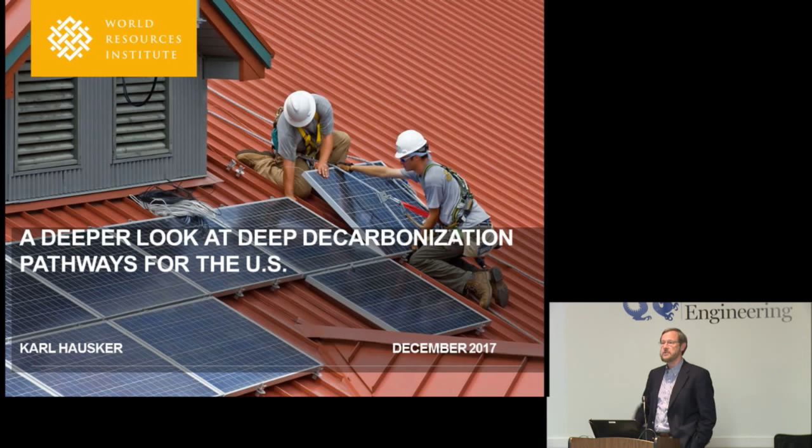Okay. Thanks very much for this opportunity to be at Drexel today, and also to talk with people online. The full title of my talk is A Deeper Look at Deep Decarbonization Pathways for the U.S. If your focus has often been very urban, we're going to kind of zoom out to the national level in my talk today. Let me give you sort of an outline of where we're going to go. We're going to do a little bit of background, talk about the 2 camps on deep decarbonization, take a look at some studies, and then talk a little bit about the policy implications.

Disclaimer, I'm speaking only for myself. World Resources Institute is 800 people, and we have, of course, diverse views across that large number of people. I'm going to be moving very fast through some material. I have lots of links in my PowerPoint, and I'm happy to email it to anyone who requests it.

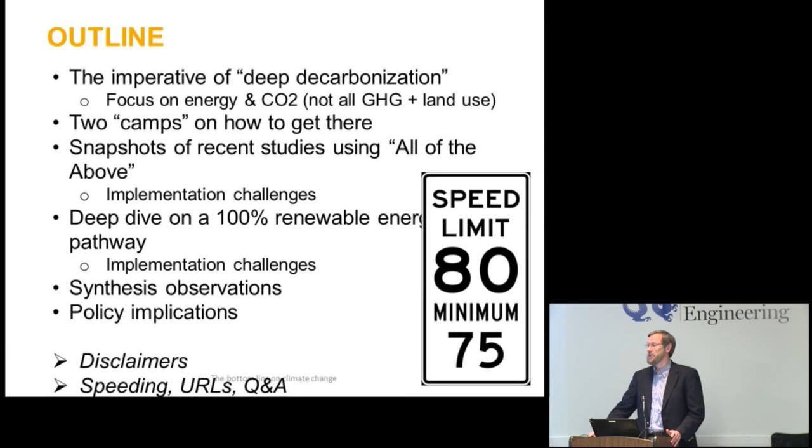But let's start with the imperative for deep decarbonization. If you don't think that climate change is an existential crisis for civilization, then you're probably in the wrong room, or you got the wrong link online, and what I'm going to say makes absolutely no sense. But if you do, then you know that we need to reduce greenhouse gas emissions by 80% or more by mid-century, and that's a big challenge, a doable challenge.

But it is a steep path. Today I'm just going to focus on energy and CO2 emissions from energy. As I'm sure everyone knows, we actually have 6 greenhouse gases to tackle, as well as land use changes that affect the amount of CO2 sequestered in soil and forests.

What I'm going to describe to you, and as many of you probably already know through your work, I'm going to describe 2 camps in how we reduce carbon from the energy sector by 80% or more. There is a camp that says we need to sort of use all the above. We need renewables. We're going to have to use some nuclear power. We're going to have to commercialize carbon capture technologies and apply them either to fossil fuel plants and or bioenergy plants and or industrial sources for which we don't have alternatives. That's one camp that I call all of the above.

There is another camp that says we can do this all with 100% renewables and with various ways to integrate those together to fuel an industrial economy. There are very smart and impassioned people in both of those camps. I'll make it plain, I am in the camp of all of the above. We're going to look at 2 studies that represent that body of literature and studies, and then we're going to take a deep dive at a prominent study that says we can do this all with renewables.

This is particularly for students. You're going to be wrestling with this for several decades. For people like me a little older, we may not see the end of this debate, but it's very important to look under the hood of these modeling studies and understand really what's going on. Why does one camp say we need a portfolio of zero carbon technologies to lick this problem, while another camp says we can do it all with renewables?

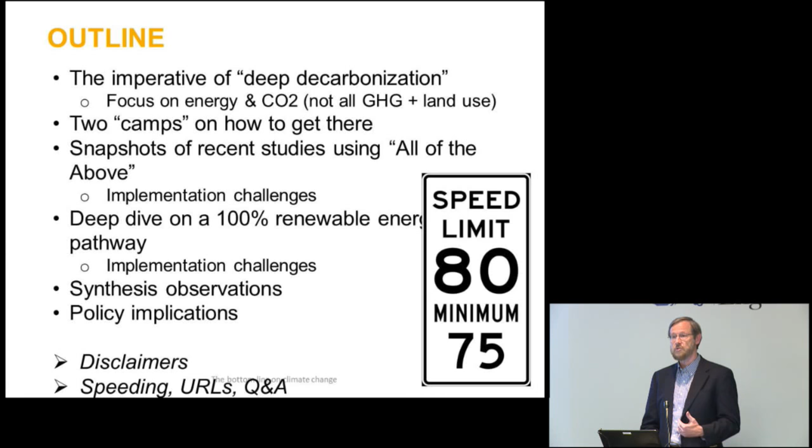So we're going to take a look at snapshots of 2 studies and look at the implementation problems there. We're going to do a deep dive on the work of Mark Jacobson out at Stanford, who has been a prominent advocate of 100% renewables, and then move to some policy implications. I'm going to stop halfway through and take some questions before turning to Jacobson's work, just because we have a setting that I think allows that.

So I'm going to talk about 2 studies that I say have a long shelf life. One I led at World Resources Institute. It's called From Risk to Return, Investing in a Clean Energy Economy. That came out in December 2016. The other, taking a similar approach in many ways, is the Obama administration's mid-century strategy report for deep decarbonization. This came out in November 2016, just after the election. Strangely, it's not on the White House website anymore, but fortunately archived at the UNFCCC. And both of these studies, I think, are important. They have a long shelf life, frankly, because the federal government isn't going to do anything like the MCS study for quite a while, unfortunately.

Both of these studies looked out to 2050. They looked at an 80% reduction in greenhouse gases, 80% across all 6 gases for the MCS report, Mid-Century Strategy Report. The Risky Business Report just looked at the energy sector. So if we look at the energy sector, across these 2 studies and the whole body of modeling and deep decarbonization, there are really 3 things we need to do.

The first pillar is that we need to switch as many end uses from the direct combustion of fossil fuels to the direct use of electricity, or to a clean fuel derived from electricity, like hydrogen or synthetic gas. So you really have to electrify the economy to the greatest extent possible. What does that mean? Transportation, obviously, electric vehicles. In buildings, it's stop burning gas and fuel oil and using electricity for all your space conditioning, of course, air conditioning, and hot water heating. In industry, it's trying to switch as many industrial applications from the combustion of fossil fuels and heat generated to, again, direct use of electricity, or perhaps burning hydrogen for various industrial uses.

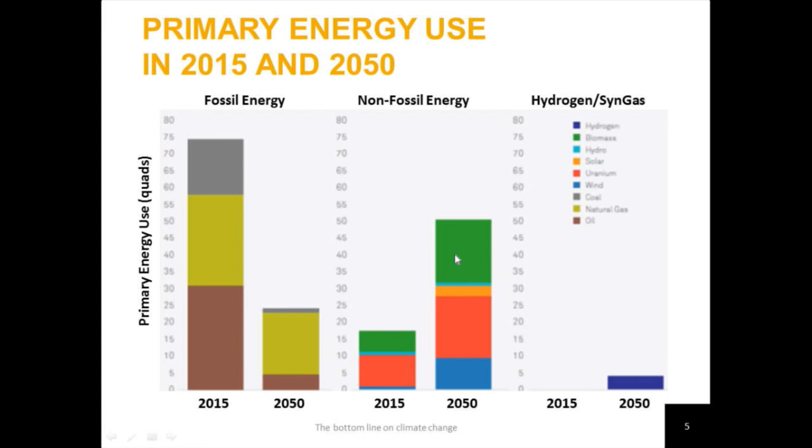You have biofuels largely right now in the form of ethanol, which is not a particularly environmentally friendly fuel in many ways. But if you are optimistic about the total biomass potential in the U.S., you can switch over to cellulosic ethanol and biodiesel and biogas, and that can play a significant role in the years ahead. And you can also, of course, grow your solar and your wind, your blue and orange bars, which look small in this primary energy measure, but you'll see they play a huge role in the power sector, as we'll see in a moment.

So in this projection, we used a model called Pathways. The MCS study used the GCAM model. Both of these may be familiar to you. Both of them have a population that grows, an economy that grows. So in the baseline projections, you have, of course, total energy and CO2 growing. But if we do the things we know how to do with commercial technologies, near commercial technologies, and apply those three pillars, we can actually have less primary energy consumption in 2050, but still supply the end-use services that we need.

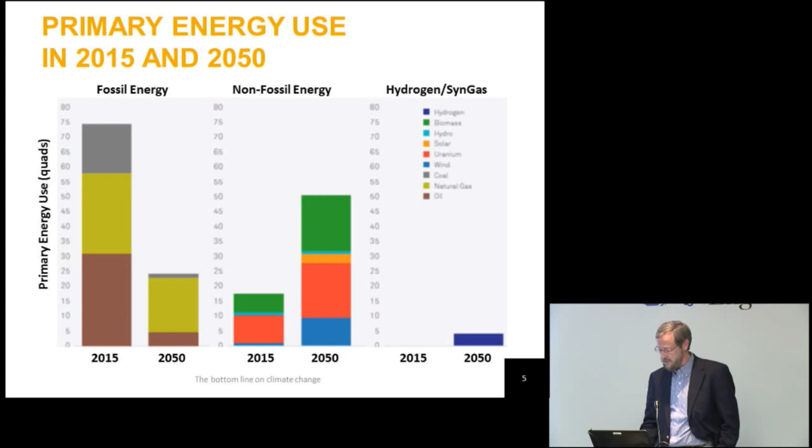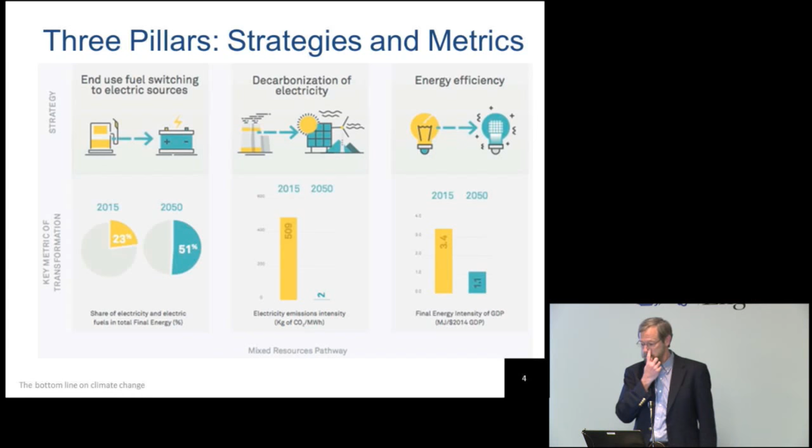Let me give you a flavor. Yes? Just on that chart where you were showing the electricity generation, you mentioned early on you were assuming that there would be a transition from fossil fuel powered vehicles to electric vehicles. So is this electricity associated with, in other words, those increases, are they largely associated with a transition from gasoline and diesel to electric vehicles? Or is there a piece of the pie not shown, which are the vehicles that continue to be powered by fossil fuels?

Yeah, this is power generation only, and the increase, I don't have the breakdown at the tip of my tongue, but I think the electrification of the vehicle fleet is probably the single biggest driver of the increased electricity generation over baseline. But there is also in these numbers the electrification of buildings and electrification of some industry sources. So I don't have that breakdown at the tip of my tongue, but I think the vehicles are a key driver of that.

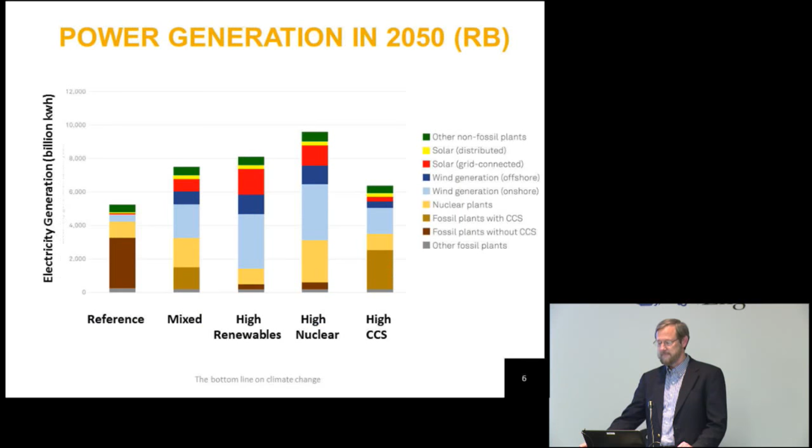Yes? In those bar graphs there, each one of these represents a scenario where we've achieved significant carbon reduction overall. So what kind of numbers are we talking about in terms of reduction in greenhouse gas emissions? Yeah, each of our pathways meets an 80% goal, 80% reduction from 2005 levels. By 2050? By 2050. But I also want to put a footnote on that, which is, for those of you who follow the science, 80% is probably the minimum we should achieve by 2050. We may need to go deeper.

So at one level, this is the least we have to do, but I also want to be optimistic in the sense that this only assumes technologies currently commercial or near commercial. Technology is going to bring us pleasant surprises over the next 30 years, mostly pleasant surprises on this front. So you can look at the glass half empty or half full on that front.

Let me describe a little bit the mid-century strategy report that the Obama administration filed, and this was done, interestingly, collectively with Mexico and Canada in late November of 2016. As some of you may know, under the Paris Agreement, nations not only set near-term reduction targets in the 2025-2030 range, but nations were encouraged to also do studies of how they can get to much deeper reductions. And this is what the Obama administration put out.

I'm sorry, this is their graphic with tiny font, but on the left we have gigatons of emissions, CO2 equivalent. We have 2005, some base case growth without mitigation, and now we see what can we do in the energy sector, CO2 sequestration, and reduction of the non-CO2 gases. And what you find here in this study is the same three pillars in the energy sector. First, an electrification of the economy and production of low-carbon fuels.

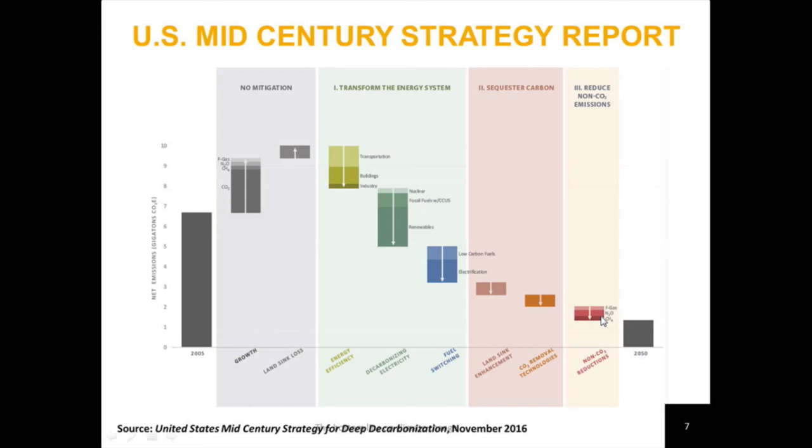That's pillar number one. Pillar number two is the decarbonization of the power supply through expansion of renewables, expansion of fossil fuel with CCS, and some expansion of nuclear power. And then finally, the third pillar, gains in efficiency across transportation, buildings, and industry. So again, similar magnitudes, all those strategies have to play a role, and the Obama administration GCAM modeling also had a role for renewables, carbon capture, and nuclear. Then they have some additional reductions on a net basis, enhanced carbon sequestration, and then some additional strategies for the non-CO2 gases. So that's what that looked like.

And just to touch base on others, what I'll call all of the above type modeling, even the Natural Resources Defense Council did modeling that was released just about 2 months ago. It's called America's Clean Energy Frontier. And again, this looks out to 2050. It also used the Pathways model as the Risky Business Report did.

But as we go from current electricity consumption out to where we could be in 2050, yes, it has a huge expansion of renewables. The color isn't quite right, but that's wind, actually. That big bar, a big expansion of solar. They maintain hydro generation, but they still have some nuclear plants operating. In 2050, they have some fossil with CCS, and they have some uncontrolled natural gas. Again, trying to make sure that the lights stay on and load is balanced.

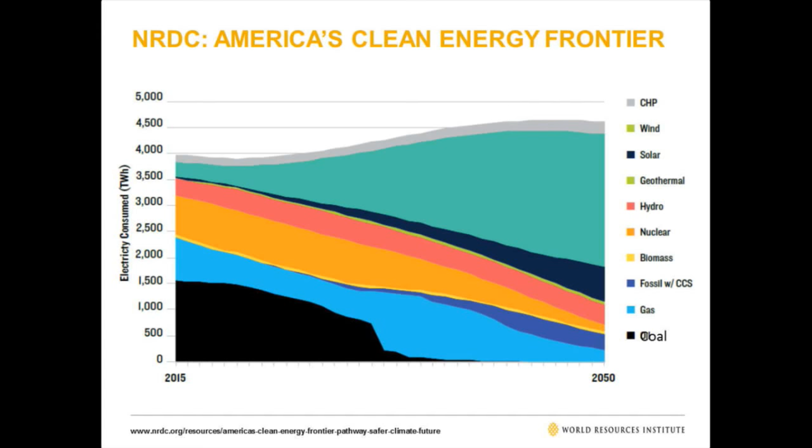If we just jump to the global level for a moment, and again, I know I'm going fast. The links are here if you want to do a deep dive at any of these studies. The International Energy Agency has over the years modeled what's possible at the global level. And last year they put out their Energy Technology Perspectives that showed where the gigatons globally would be under a 4-degree scenario if we sort of do what we've promised we're going to do so far.

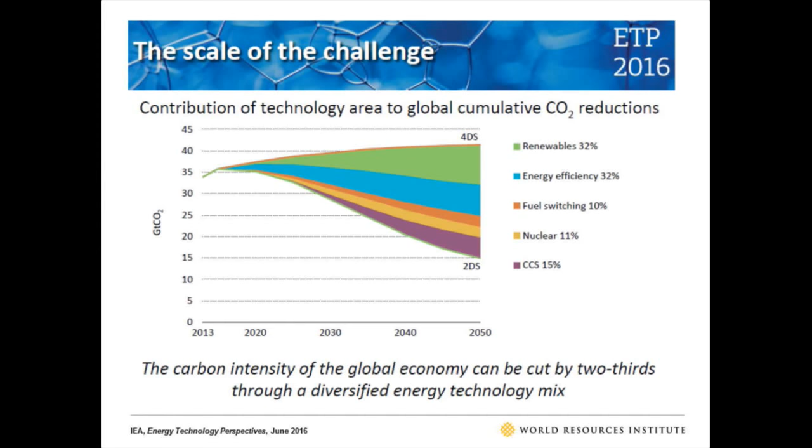But how do we need to go further to take that down to gigatons globally that are consistent with a 2-degree warming scenario? And again, they sort of say all of the above. Expand renewables like crazy, become much more energy efficient, but switch out of fossil fuels into biofuels, expand nuclear, and develop carbon capture technologies for some of the fossil. So this is what I call the larger body of mainstream modeling that says we need all the tools.

This pathway has its implementation challenges. First of all, of course, there's a lot of opposition to the expansion of nuclear power in various countries today. It also tends to be very expensive, especially in the U.S. and Europe, trying to build a plant. Other places, they seem to be able to bring plants online at a more reasonable cost. Carbon capture is still not fully commercialized. We've done some promising pilots. It's still pretty expensive. And there may be public opposition the first time we try to really build plants on a larger scale.

Renewables, of course, face their own siting problems. If you like hawks, you don't like what windmills do to hawks. If you like tortoises, you don't like vast solar arrays in the desert sometimes. So each of these has political opposition. But turning to more technical implementation challenges, just the pure rate of power plant construction over the next 30 years is kind of daunting. 2 to 4 times historical rates of construction if we're going to electrify the economy.

That expansion also has to be accompanied by an expansion of the transmission and distribution systems. And as many of you probably know, just building any transmission line in the U.S. right now faces very stark NIMBY problems. The electric vehicle infrastructure that it would take to electrify the fleet faces some interesting challenges. Are we charging vehicles at the workplace, at home, both places? Do we have fast charging technology, slow charging? Do we do battery swapping? We're not sure yet, and we're not sure how to integrate the transport sector and the power sector in a way they've never had to work together before.

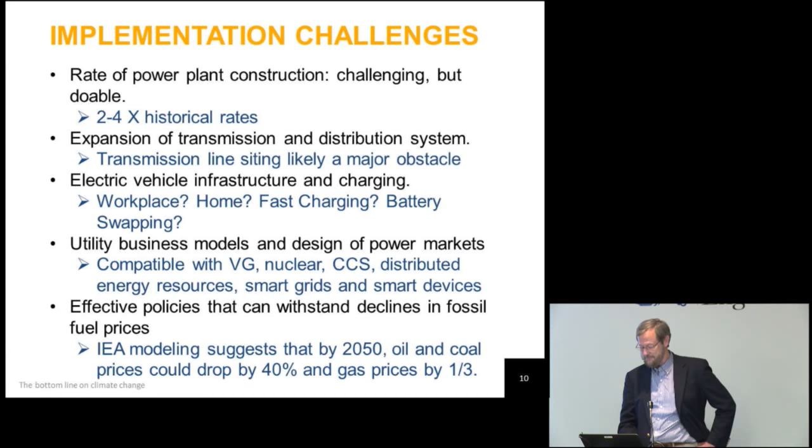But that's also an interesting implementation challenge, along with the kind of discussions that are already underway about changing utility business models, changing power market design in the wholesale markets in a way that will enable this rapid expansion of the power sector. There's also something about what's going to happen to fossil fuel prices, which I won't go into, which is kind of an interesting challenge as well.

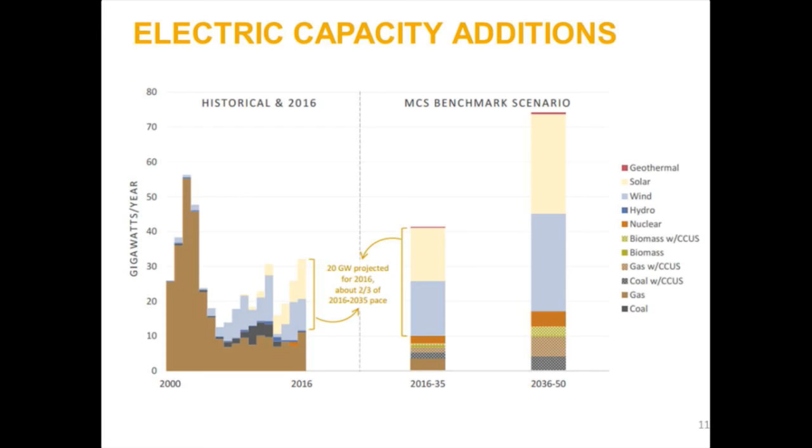Well, that needs to increase over the next 20 years under the Mid-Century Strategy Report scenario to over 40 gigawatts per year. And then in the remainder of this first half century, we need to go over 70 gigawatts a year as you really accelerate the electrification of the economy. Is this impossible? No. But you have to line up the policy, you have to line up the financial sector, you have to line up a lot of things to enable that rapid expansion.

So let me stop there. I'm going to switch to the 100% renewables, but again, I invite any other questions and any online questions on the first part of this presentation.

Yes? Do you have any thoughts on what can be done to further this sort of decision-making? I'm sort of assuming that if we had a carbon tax or a cap-and-trade system, that would incentivize all of this. And there's a lot of talk now about what localities and subnational actors can do. Do you see a role for subnational actors in the absence of a carbon tax, in the absence of a national policy that could possibly affect this? Mm-hmm. Yeah.

I'm a little depressed about the role of federal policy over the next couple of years, and my talk so far has been kind of policy free. As with the discussion on the 100% renewables, we're looking more at kind of the technical feasibility. We can also talk about cost a little bit, but of course none of this is going to happen without policy. And so the bad news is, looks like we are totally going the wrong direction at the federal level.

But the good news is that there's been an incredible surge of support at the state level, local level, business level, and I think the U.S. can keep some momentum going over the next couple of years. Not the full momentum that we need, but hopefully wiser heads will recognize that we need strong federal policy. A foundational driver is a carbon tax. I don't think it's sufficient.

Some economists may differ, but in my view, a combination of a carbon tax as kind of a foundational signal, along with a series of well-designed incentives and regulations, some at the federal level, some at the state level, some at the local level, need to combine to create the scale of change and the direction that we need.

For instance, smart growth and transit-oriented development are an important part of becoming a more energy-efficient society. There are not many federal or state levers that can affect that very well. They can create a supportive environment, but a lot of those decisions are at the MPO level, city level, county level. But we can come back to a policy discussion at the end. I don't want to go down that road too far right now.

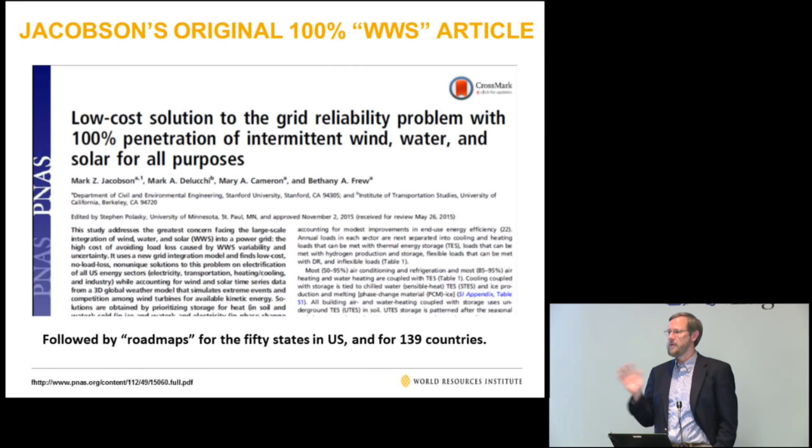In the interest of time, I should move on to 100% renewables. And again, I want to caution that there are very smart and impassioned people in both camps. I happen to personally believe I'm in the all-of-the-above camp, and I'm going to talk about the 100% renewable camp and some of the criticisms that have been leveled at this work.

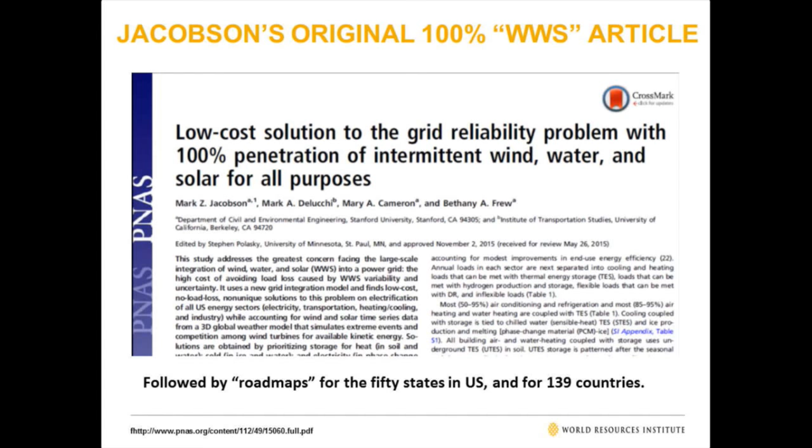Mark Jacobson and some co-authors first put out a scenario for the U.S. of 100% wind, water, solar, all renewables in 2015. They have followed that with publications that have provided sort of similar roadmaps or pathways for each of the 50 states and also for 139 countries. So they have a model, they have an approach that they feel works sort of across the board.

There have been a number of people who care about climate who have really embraced this idea of 100% renewables. You have Hawaii setting a law that says 100% renewable by 2045, legislation in California, Oregon, Washington, other states. Four senators introduced a 100% renewable by 2050 Act. You have cities, over 100 cities, I think, that have said we're going to go 100% clean energy, and I think they mean, you know, renewables. Over 100 companies embracing this.

And Jacobson's work has put him on the cover of Scientific American and TED Talks, and it's really become kind of a base for saying this is how we should go. And it's also reinforced by the fact, as I mentioned earlier, that the cost of solar and wind has dropped dramatically over the last 10 years, and also we're developing batteries, prices have come down.

So what's not to like about this? It's very significant for those of you who want to stay close in this field. There was a very significant event in June of 2017. Just as Jacobson published in the Proceedings of the National Academy of Sciences, 20 leading climate and energy modelers published a quite withering critique of Jacobson's work in June.

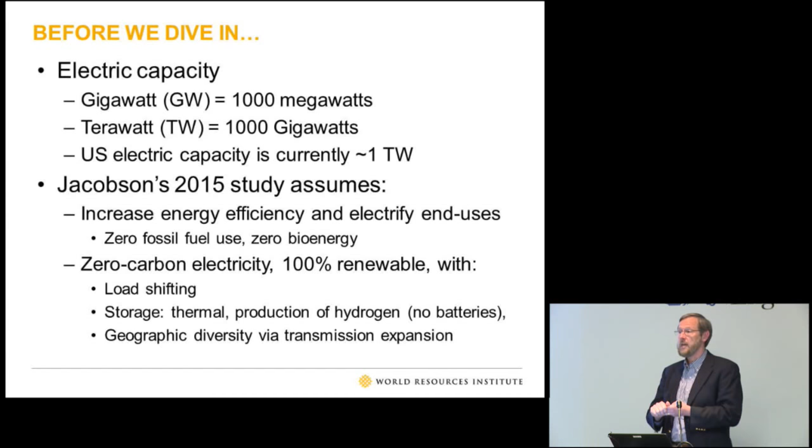And finally, he takes advantage, as all modelers do, of aggregating across geographies the production of wind and solar, which the more you can aggregate with transmission lines, the less variable it becomes. As the sun may be shining here but not there, wind is blowing here, not there. This is all pretty straightforward. Qualitatively, how do you integrate variable renewables? You shift load, you store power, and you broaden geographically the area which you're producing.

So let's take a closer look at his numbers. And I'm sorry for the quality of these charts. This is only the second time I'm doing this talk, and I've basically pulled in Jacobson's tables and some figures, and I've tried to annotate them to try to get you to some of the key features.

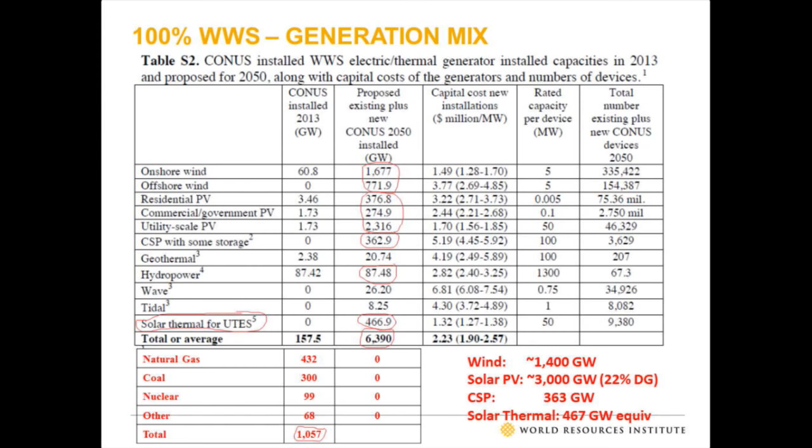You add all those up, and you get to a 6.3 terawatt capacity power system. That is huge. Or just to be sure, if we take out the pure solar thermal to store heat, we're a little under 6 terawatts. So multiplying the system almost by a factor of 6, that's a lot more than all of the above scenarios. But that's what our generation mix looks like.

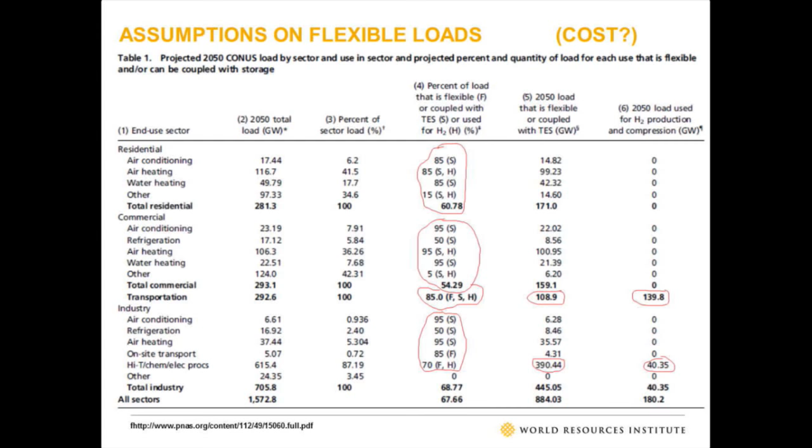That's a very important strategy, but things like this are unprecedented in terms of the small experience we have with demand response and load shifting currently. So that's something to keep in mind. And by the way, he has no cost numbers for what it does to do this. It's implicitly assumed to be done free, and that's also a pretty heroic assumption in my view.

Second big integration strategy is storage. This is his chart on how he does storage. Most of the items are pretty small across phase change materials. He's producing some ice, phase change materials that go into concentrated solar power. But the big heavy hitter here is underground thermal energy storage, or UTES, where he has, again, 500, 700, over 1,000 gigawatt equivalent of underground thermal storage.

This would require retrofitting underground thermal storage across all sorts of buildings across the U.S., again, at a scale we've never seen before. And he also has some thermal storage that keeps the power towers running in the desert. These are very big numbers, and you can see in one of his footnotes, he's storing 30 days of heating load at the peak winter in some kind of materials, solids, liquids, phase change materials, to get us through winter times when renewable production is way down.

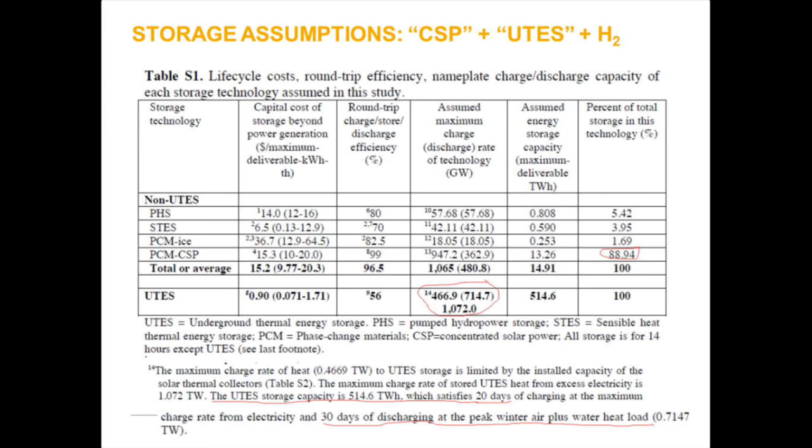Finally, that third integration strategy is transmission, making sure that we can wheel power. I have a graphic here that shows how this is done by very detailed granular modelers who physically model the system, transmission flows, transmission lines that need to be built, etc. In Jacobson, he kind of has a geography-free model. There is no spatial modeling of where plants are built or where transmission lines.

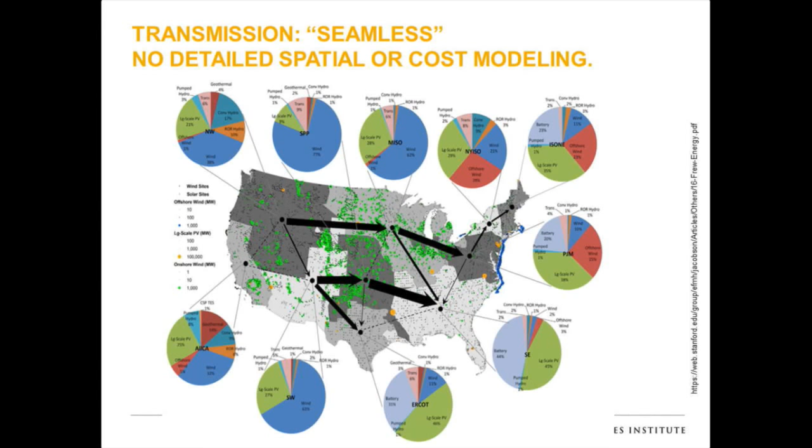He sort of just aggregates the country and assumes that a transmission system will be built that can wheel power very freely around. He has a cost number in there, but it's not driven by careful spatial modeling, which again I think is something that we need to take a deeper look at. Let me just stop there for a second on questions before we go to do an even deeper dive on how this might play out in balancing load. Storage, flexible load, transmission, sources, yeah.

The load shifting, can you explain in detail sort of what that means? Yeah. For industry, it means running plants. Part of the strategy is running plants in the middle of the day when there's solar electricity available. You might not be able to have 3-shift factory plants anymore. You might be able to operate your factories only when we have power available. It means producing hydrogen when the renewables are available and storing it and not producing hydrogen the rest of the time.

It means charging electric vehicles only when we have wind and solar available, but running them down when it's not available. We're taking baby steps in some of these directions, just cycling an air conditioner. You can't run it all the time, run it when the utility lets you run it at a relatively low production cost. But it would be a massive transformation of the power system to have the degree of load shifting as illustrated in some of these figures. I kind of described it, and then his load shifting is shown in some of these graphs. Yeah. Well, just to build on that for a second, so some part of that equation is possible if there's a will.

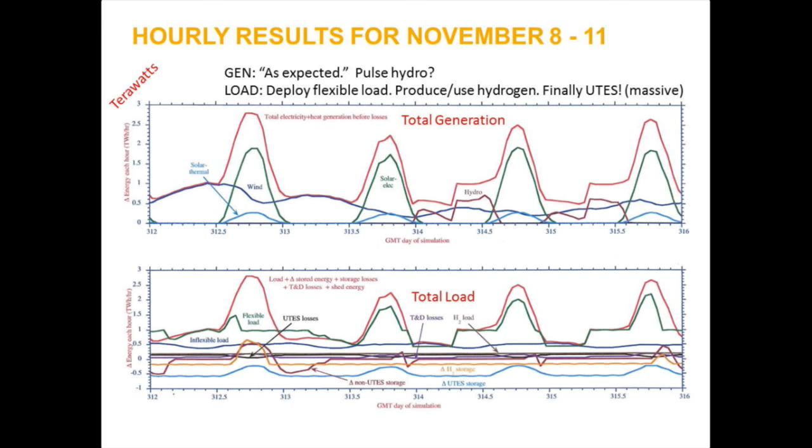It's not like this every day, but he runs his model like anyone would, and each day is going to be a little different, but there are patterns, of course. And then on the bottom, we have how he uses flexible load and storage, and I'm going to zoom in because this is so hard to read, but he offers up these sort of 4-day depictions from his stochastic modeling. Now let's see if we can really figure out what's going on.

So here's the same graph zooming in on 2 days. And again, typical day, you have a nice hump of solar production, maybe about 10 hours or so. These are half days, so maybe that's almost 12 hours. And then the wind, the blue line goes up and down. You add it all together, and here's your total generation. And now we have to figure out what's going on in the rest of the system that somehow matches the

generation we're doing. So on the bottom, in those same hours, first of all, we just have some inflexible load going on here. But Jacobson is saying, I have a bunch of flexible load that can be shifted on the order of 1.5 terawatts. Again, remember, our whole system now is 1 terawatt power. Over here, he's shifting almost 2 terawatts of power to the peak of generation of renewables there.

In this down here, he's taking, let's see, I think this is hydrogen production. In those couple of hours, he's running those hydrogen plants, producing hydrogen, but when the sun goes down, now he's below the zero line. He's using hydrogen across these hours. This is November, it's kind of cold. He's discharging thermal storage to warm buildings, I believe, with this light blue line.

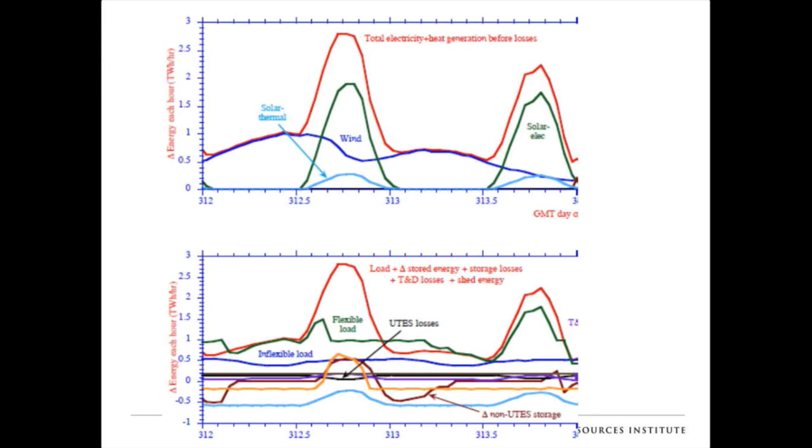So you sort of orchestrate various types of storage, various types of load shifting to make sure that you still keep the lights on, that you're balancing supply and demand of electricity every hour of the day. Whether we can shift load like this, 1 terawatt, 2 terawatts, is a big question.

The second scenario I'm going to show and then wrap up is 4 days in January. Again, this is lifting out of Jacobson. Again, total generation up here, solar, wind. Now hydro comes into play. Total load down here, flexible loads, inflexible loads, UTES underground storage, charge, discharge, hydrogen production. Now let's zoom in so we can actually see what's going on.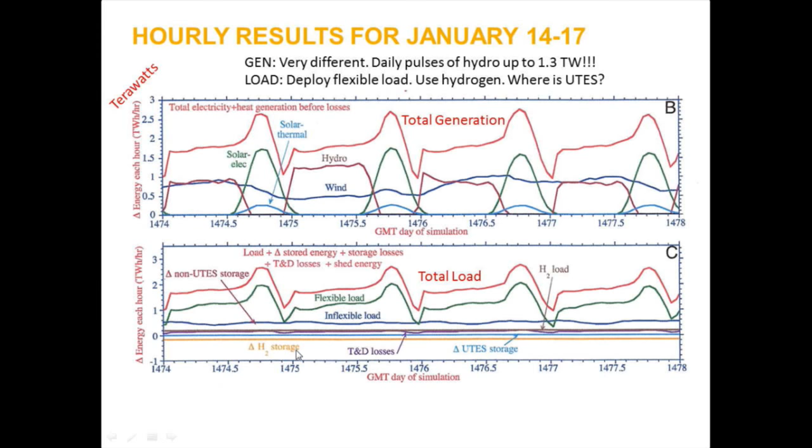Something very puzzling happens on these days and scattering of days through Jacobson's modeling. Here we have our typical solar power in the middle of the day, going up and then down to zero. Here we have a little bit of cascading up and down wind production, a little bit of solar thermal. But whoa, what is happening to the U.S. hydro system? The U.S. hydro system is pulsing up to 1.3 terawatts of power for several hours and then dropping back to zero. Here it's pulsing up to nearly 1 terawatt and dropping back to zero.

Jacobson was criticized extremely heavily for this feature among some other features of his modeling. If you may recall, that table I put up at the beginning said the current U.S. hydro capacity is about 87 gigawatts. So by 2050, how do we pulse several hours of 1.3 terawatts of power, more capacity than the entire U.S. capacity of anything right now?

And Jacobson, in some comments and responding to questions, said, I came up with a new idea. We go into the existing U.S. hydro system, we keep the existing reservoirs, but we increase the instantaneous capacity by about 15-fold. And this is a way we can use the U.S. hydro system as sort of a giant peaker to match load.

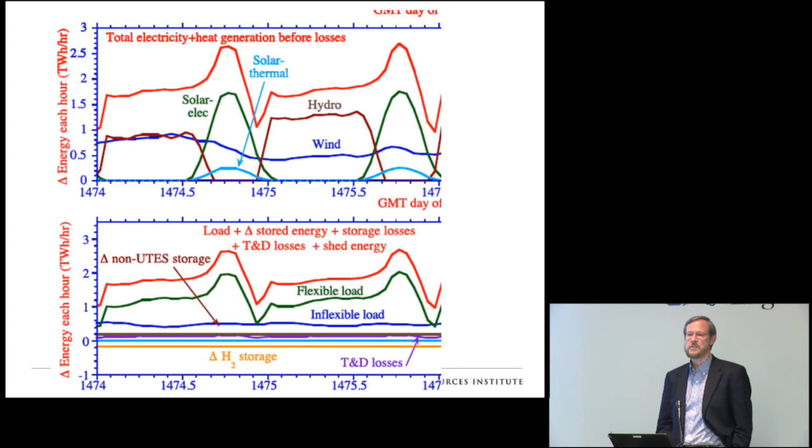I hope to take the time to dig into some of his 50 state studies and 139 country studies to see where does he go from here with batteries or hydro or thermal storage. But this is how he balanced load in that 2015 study, and he was heavily criticized for it.

So I'm going to wrap up. I know it's already 5 o'clock, but I really heavily commend to you a study by my colleague Jesse Jenkins at MIT and Sam Thernstrom in a DC think tank, who looked across 20-plus studies of decarbonization and teased out some of the insights, some of the modeling approaches across them.

And they have a couple of synthesis observations that I think are well worth paying attention to. First, if you build a system that's dominated by variable generation, wind and solar PV, it has to be physically larger, and the total capacity has to be 3 to 4 times peak demand, because you have to move that power around on a daily, weekly, monthly basis to balance all hours and all seasons.

What you're going to need to go with it is either a shadow system of dispatchable generation, fossil or otherwise, or very long duration seasonal storage. 2 to 3 months of some combination of electricity and thermal energy to balance everything out and to account for lower fall and winter production, or simply bad weather systems that camp on top of parts of the country for a long time that will decrease wind and solar production.

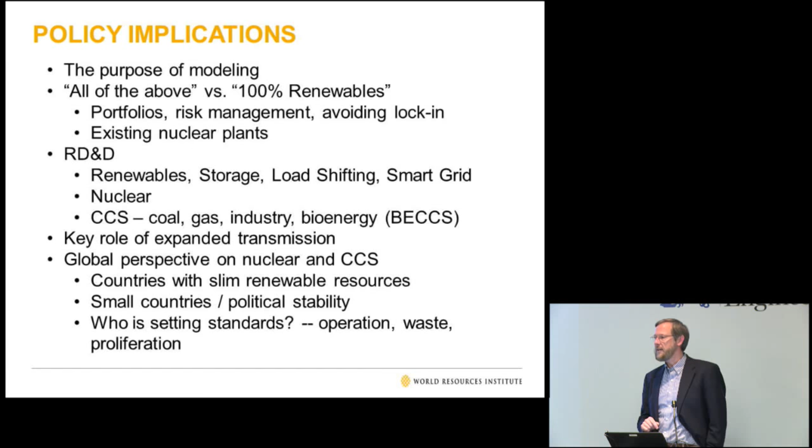I'll stop there. This is a fascinating field, lots of challenges no matter which path we go down, and whether you're an engineer or an economist or a lawyer or a policy analyst, we need all hands on deck of the smartest people to figure our pathways out to 80%, 90%, 100% emissions reductions in the coming 30 years.